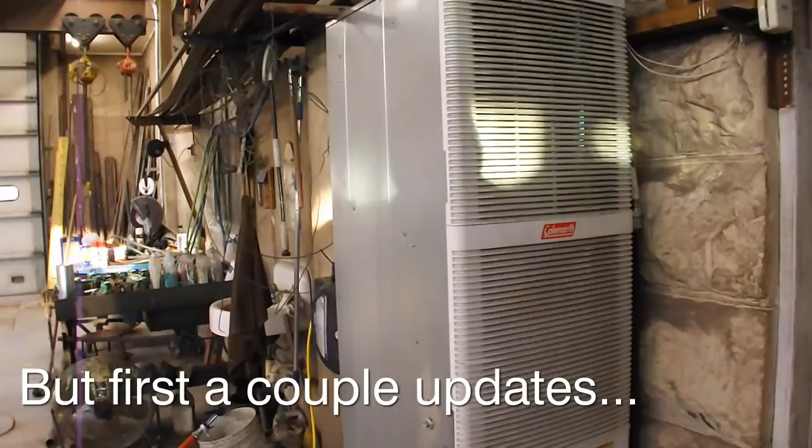It's been a few days since I've had heat in the shop, and it got cold in here, but it's up and running. Furnace man got it going finally. He could have had it done really quick, except he had to order some parts. But I tell you this largely because I want you to realize how much quieter the furnace is now.

I had realized when I started up this fall that the camera was really picking up the furnace. Anytime it would kick on, it was really hard to hear me. I'm standing really close to it right now, so that's probably making it a little bit harder to hear me, but it was really an annoying noise coming out of it.

And then one day it quit. So I called the furnace guy and he came out and he instantly told me that the combustion fan blade had literally disintegrated. He thought maybe that's why it was making a lot of noise at first, because one of the blades had come off and it was unbalanced, and then it finally just exploded.

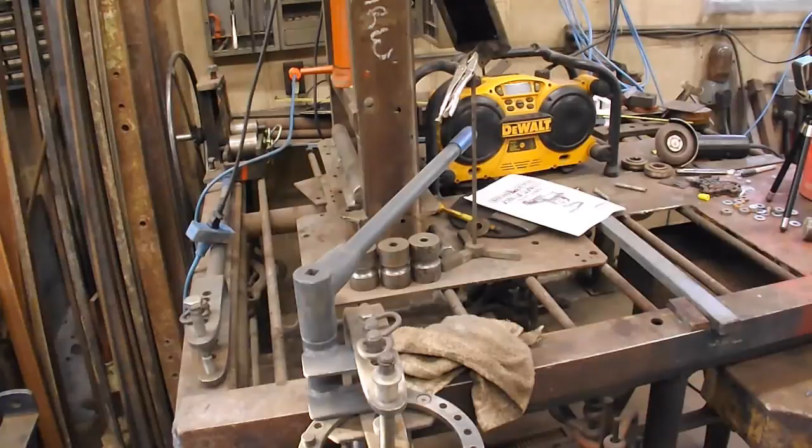But anyway, it's up and running. Should be a lot quieter in the videos. We'll see today if you can hear me when I talk, and this is my normal distance away from it. Oh boy, it sounds a lot quieter. It's kind of like a porta power, whatever you want to call it, for me. You know, I just got quick connects on there and off the hydraulics of the crane.

But enough about the furnace. I just received an order for a mud bench, and I have to have it done 5 days from now. And you say, oh, you got 5 days to do it. Well, that includes making it and getting the paint to dry, and that doesn't include all the other jobs I have to do along the way. I actually have quite a bit of a backlog going right now. Normally January is a really slow time for me, but it has been super busy.

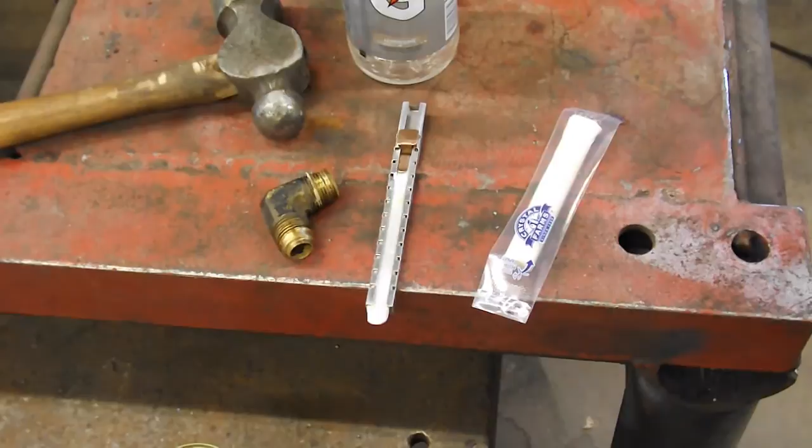I'm grateful for it. And since I'm jabbering on about things I had to do, might as well add one more thing. I had some fuel troubles in my welding truck this week. When I get down to about 10 degrees, I just couldn't go anywhere. I had no power. I could tell I wasn't getting fuel. So I brought it in the shop. Just assumed I had some water in the fuel or something, and it was icing up.

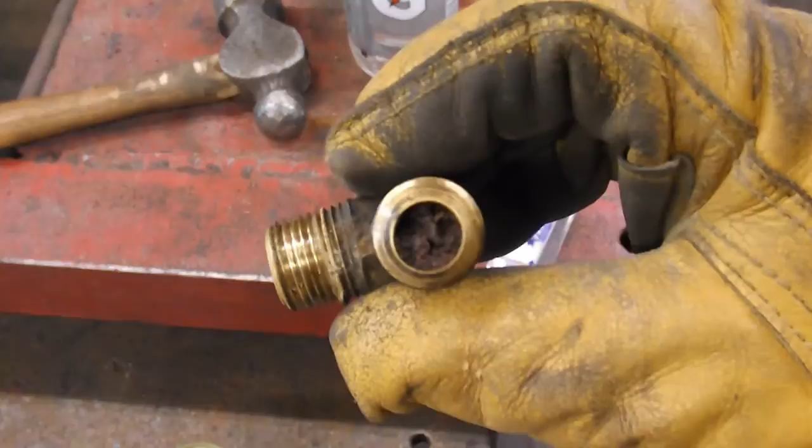So I started looking at things and playing with things, and I took out the suction line. Can you see that? It was a bit clogged. That is rust out of the tank. That is bad. I don't even know how I was getting any fuel through it. Tell you what, it runs a whole lot better now. It's amazing. Of course, it's a 1981 truck, so you know it's bound to have some issues by now, right?

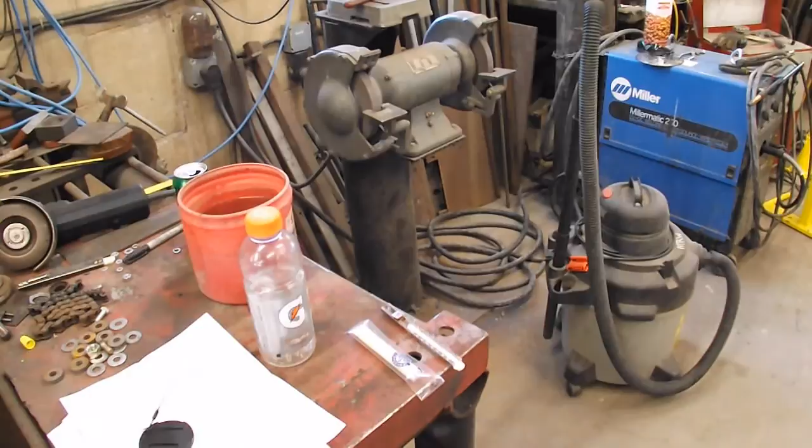Okay, I'm going to show you a dead mouse here. So if you don't want to see it, look away. I'm just going to show you really quick. But I caught a mouse in my dog's water bucket during the night, apparently.

The reason I showed you that real quick is not to gross you out, but it reminded me that I haven't told everybody, but that yellow shop cat that hung around, his name was Wash, he passed away. So it's been kind of sad. He was only 3 years old. I don't know what happened to him. He disappeared for about 3 days, and he came back home skinny. You could see his ribs. He laid down by the water dish and died. So I don't have a clue what happened, but it was very sad.

But anyway, I need to find another cat, because obviously I still have mice in here. Sorry for the image of a dead mouse there. Let's get back to work. Mud bench I'm building—I'll show you a couple pictures here of ones I've made in the past, that way you kind of have an idea where I'm going.

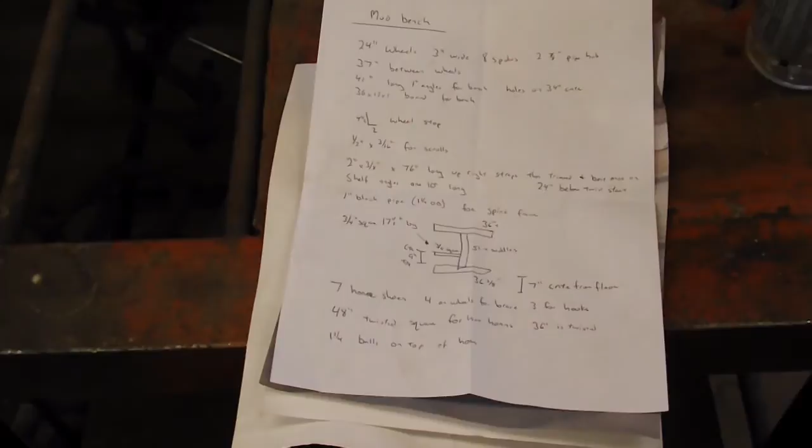And then I'm going to start getting materials laid out here and start figuring out what I'm doing. I haven't actually sat down and made a computer drawing of this thing yet, and I need to, because I keep getting orders for these things. But this is my squigglings of my dimensions and kind of what I need to do.

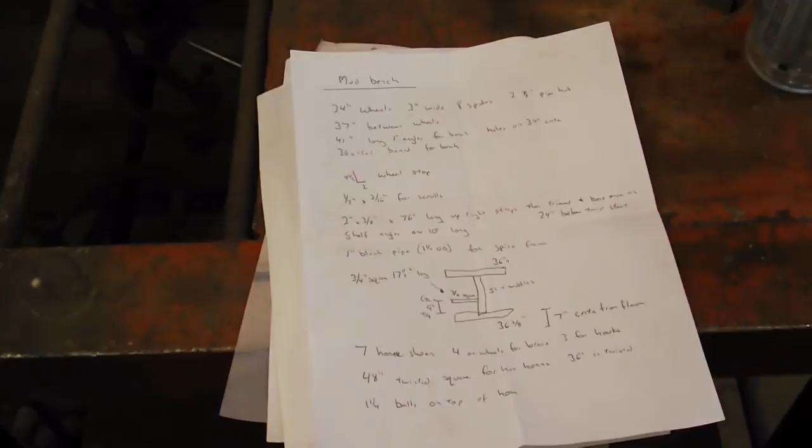While I'm rounding up my materials, I'm going to start the horseshoes in the electrolysis. These are some used horseshoes that a cousin of mine gives me from a ranch out in Colorado.

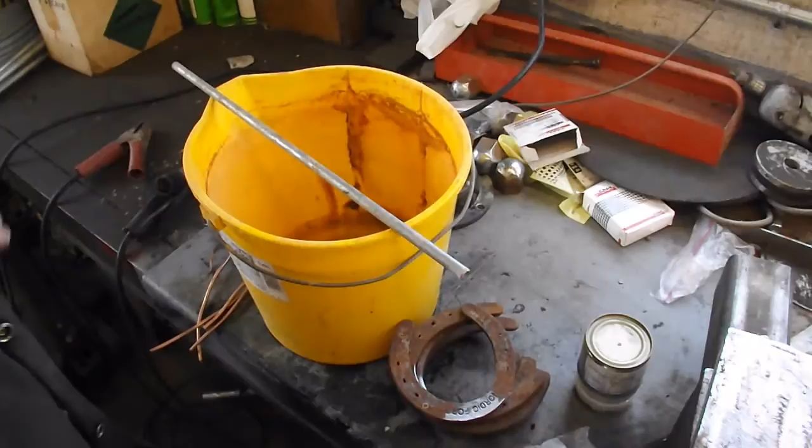Well, I got my little bucket up here on the bench. Normally I do this outside, and I highly recommend doing it outside, but seeing as how it's winter and that ain't gonna stay upright without water in it, and it's 20 degrees outside, I am going to do it in here.

I'm right next to my window over here so I can open it and get a little fresh air now and again. This shop is pretty drafty anyway, so I don't worry about it too much. So my official stance is don't ever do this inside.

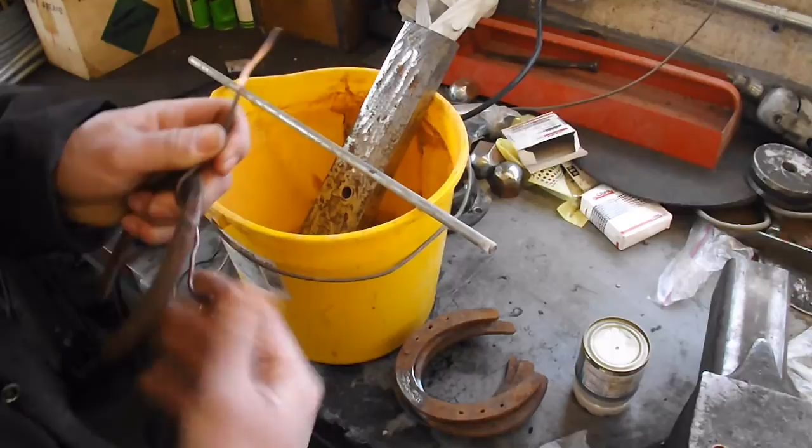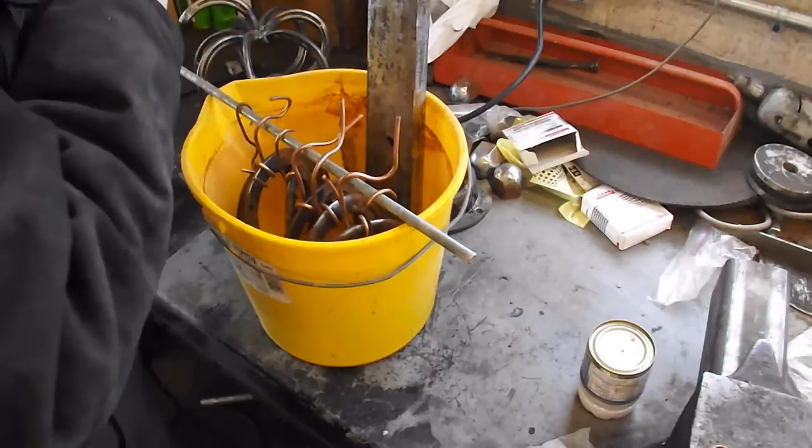Let's see here. We'll see if that'll accidentally stay in there. Yay! Let's see, positive over here, right? Because I want it to flow from the horseshoes to the scrap metal, so yes, that would be the correct direction, because it flows out of the negative and then returns into the positive.

Okay, so I got them hanging in there. That one's not bent quite right.

And we'll turn on the battery charger and see if we can see bubbles.

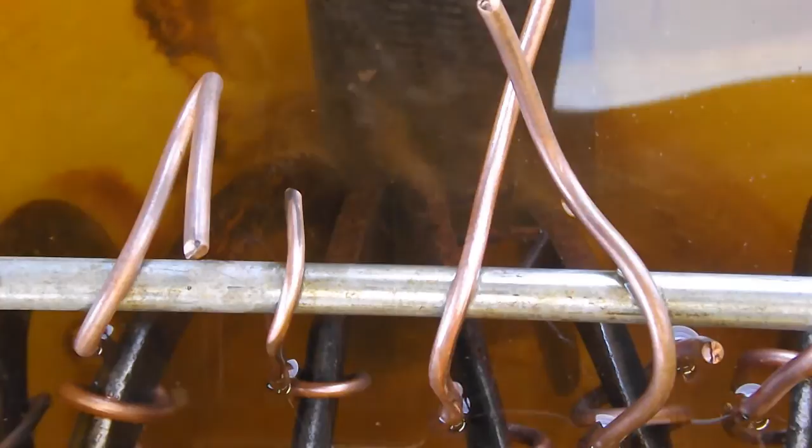So we'll check back on this in a couple hours. I imagine within an hour, actually, there'll probably be a layer of scum floating on top of this thing. And then eventually I'll turn all these half a turn so the other side of the horseshoe is facing the piece of scrap iron. But boy, it's bubbling already.

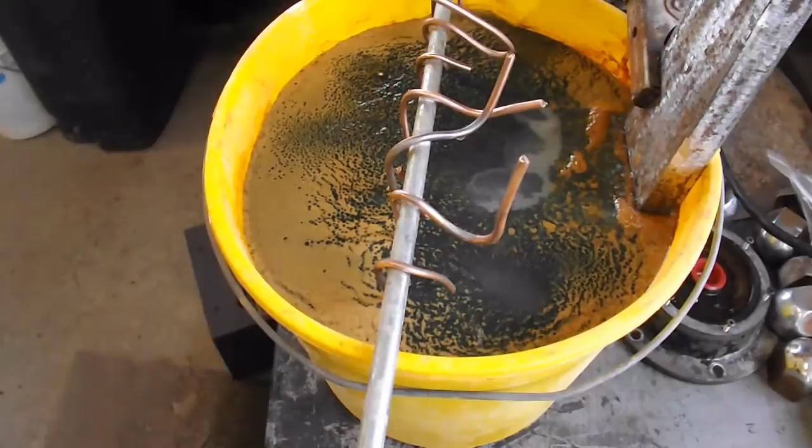Well, I thought I'd take a little break from building the frame and show you the progress on the horseshoes. Look at all that yummy crap that has floated up already.

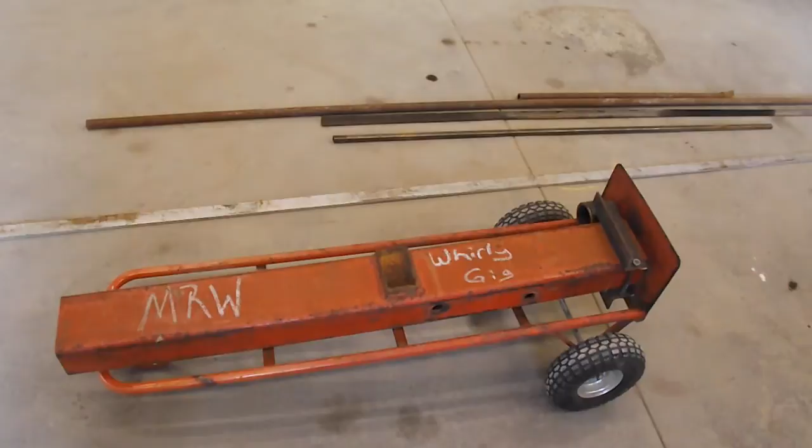I have most of the metal for the frame of the mud bench laying here, and I got my whirly gig laying here. I'll get it set up on the table and show you how it works.

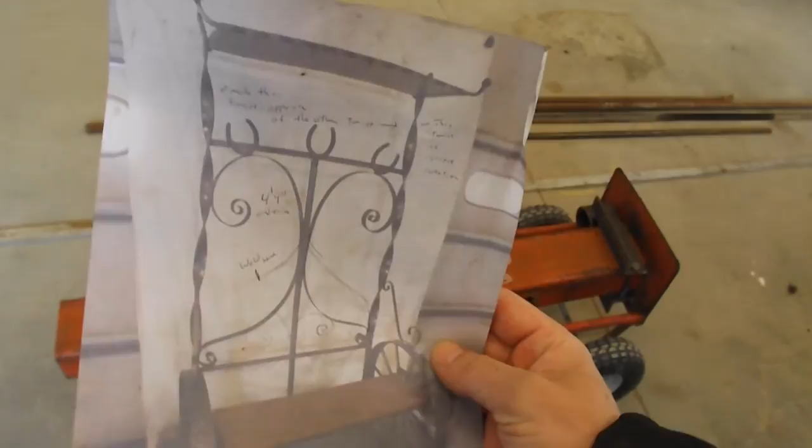I put this thing together to twist the metal on the uprights of the mud bench here. I twist that metal. This one, you can see it kind of weaves in and out a little bit because I did that just by clamping it onto a table and using a pipe wrench and making the twists, and it didn't come out very straight.

So the next one I did, I made myself a little jig so I can turn these. And I have to remember to twist them opposite - one goes clockwise and the other one goes counterclockwise when I make them, so they'll fit together correctly. Anyway, I'll get this set up and show you how this works.

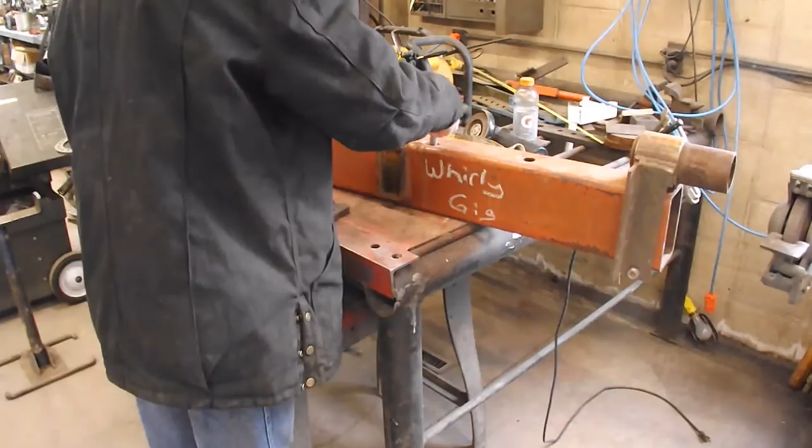In case you're wondering, the way this works is this piece slides on here. Put that at the end, flush at the end.

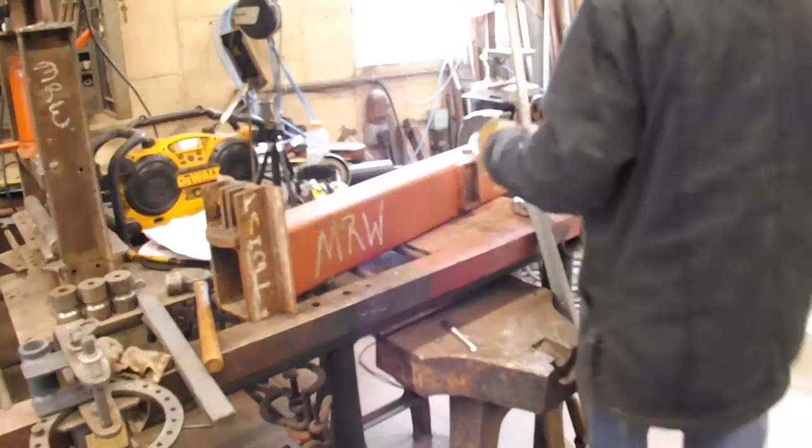Yep, okay. These are 2 feet from the end is where I start. Just drops in there. And then slide in here.

On this side, I have a piece of pipe that I welded a couple strap irons in there. Then I use my little pipe wrench and just start twisting.

Before I get started on that, I'll have to remove this coat. I'll tell you that right now.

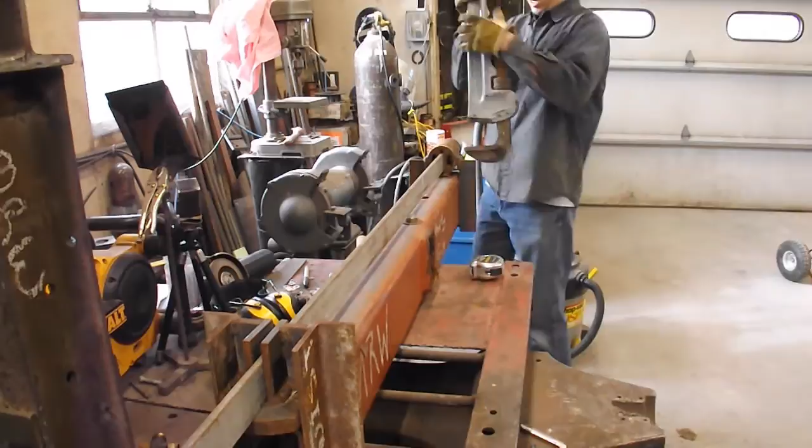I think I'm out of shape. Let's see, last time I went this way, so this time I'm going to go this way. I don't know if I can clear it over here. Alright. Whew.

That's pretty close. Yeah. There we are.

I was just looking at these twisted pieces I did, and I realized I need to go another turn. There's supposed to be 4 twists in it, and I did 3.

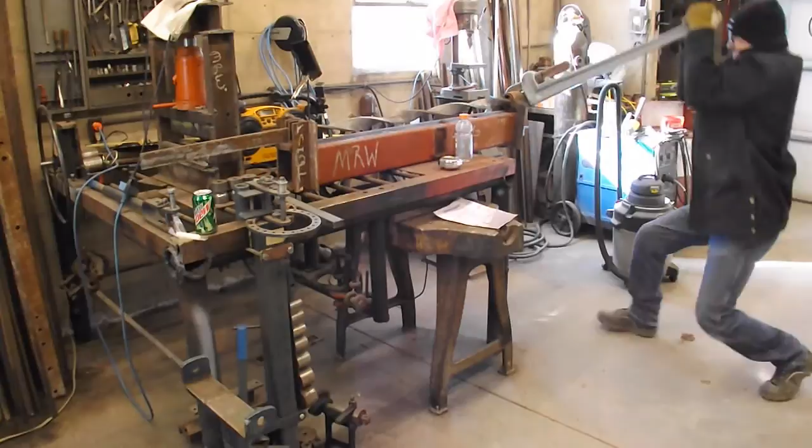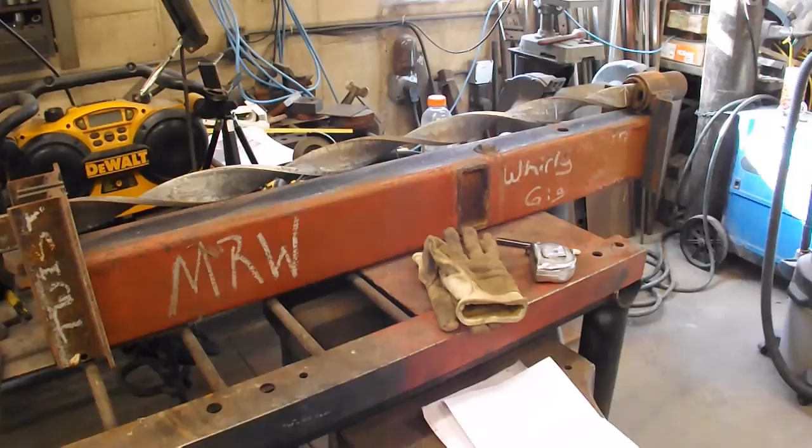I got 5. Oh man. Yep. So I only needed half a turn more instead of a full turn more. But I think I'm gonna go ahead and go with it.

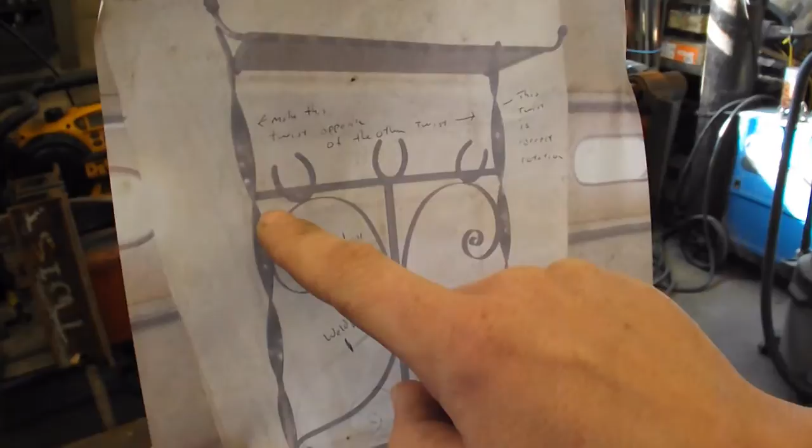This chalk mark right here is where the top bar comes across. This bar right here needs to fit between the two, in the flat between the twists. It'll put it 1 inch higher. So I think that's doable. That won't change much. I'll just slide everything up 1 more inch, which is no big deal.

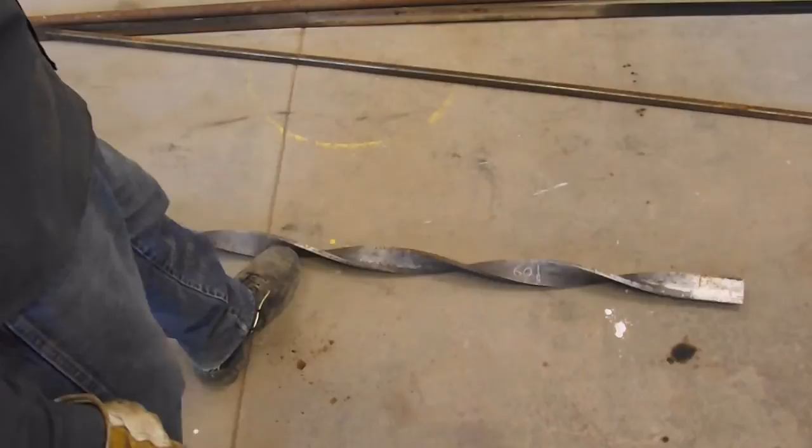Well, guess what? I untwisted it. I went backwards half a turn. And there was the 61 mark, and you can see it's not quite in the flat spot correctly. There's the 60 mark, and it's in the right flat spot. Those things are a foot apart, and all of them untwisted evenly. So I did not know you could untwist a twist and it would work.

So yeah, that's exactly what I'm looking for right there. So let's finish up this other one here real quick. That'll work. Whew.

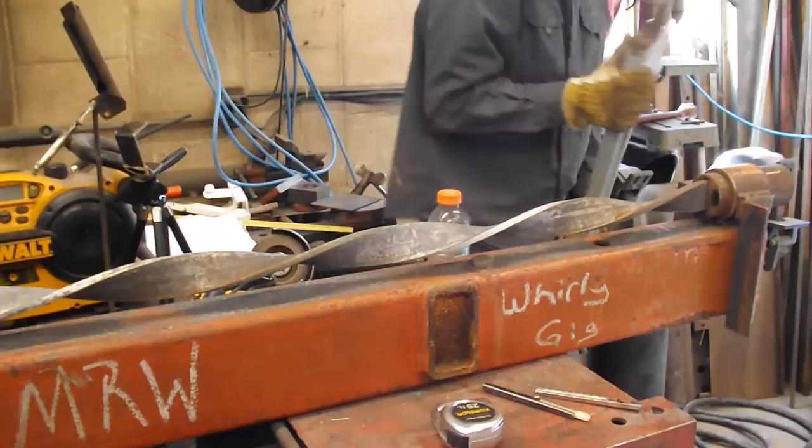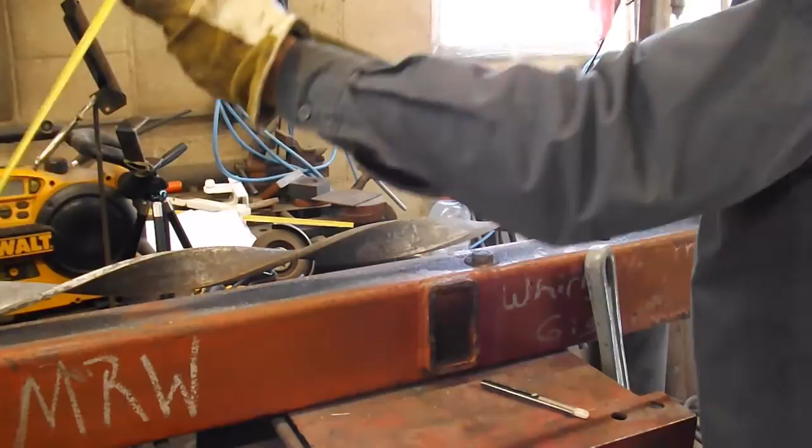Alright, we'll measure up 60 inches. And what do you know? It's in the flat spot. Okay, sweet, those are done. Back on track. Let's get to cutting out some other pieces.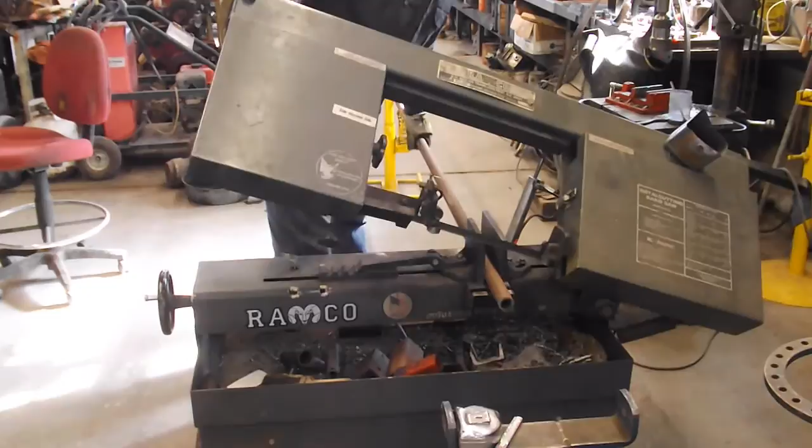16 too long. Gonna leave it.

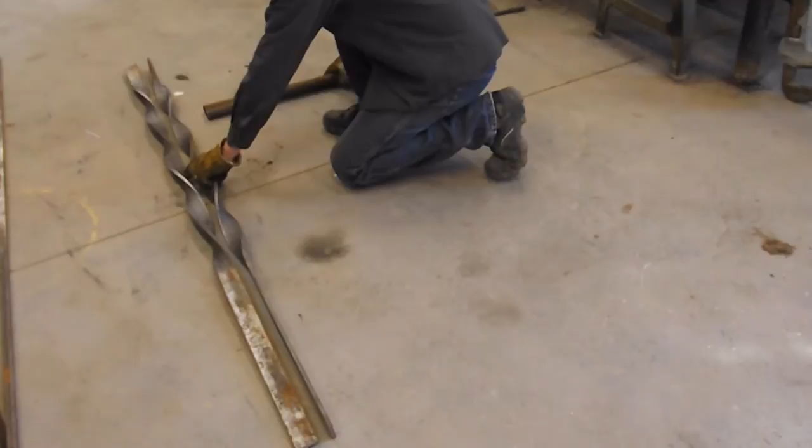Bandsaw is not shutting off today. Ooh, nope. Down there. Okay.

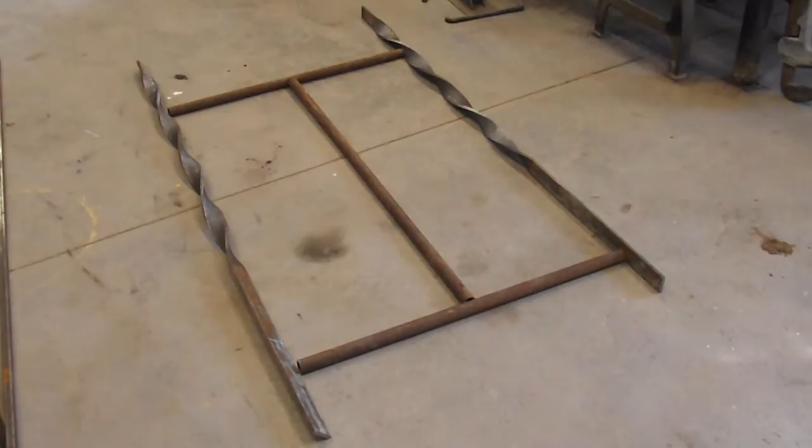I think now I'm going to take all these outside and clean them. It's nice and windy today, so that'll be great doing that outside. It'll blow all that crap away from me. It's also really warm, 60 degrees again today.

Let's see, I think that might have been the last video I did. I don't know, I'm kind of off on my videos because it takes time to edit. Some videos are really quick to edit, some are really long to edit. Some I have to wait till the finish or whatever. So I don't get my videos uploaded in chronological order by any means.

But in one of the videos I did recently, it was 60 degrees and there was a thunderstorm rolling across the plains. Then the temperature dropped to below 0 again, literally 2 days later. It's been super cold ever since, about 10 degrees for a high. And today it is 60 degrees again. I don't understand what's going on with this up and down weather. But hey, I guess I'll take a 60-degree day. That's better than 10 for a high, right?

Alright, anyway, enough babbling about the weather. Come on, get to sanding or something.

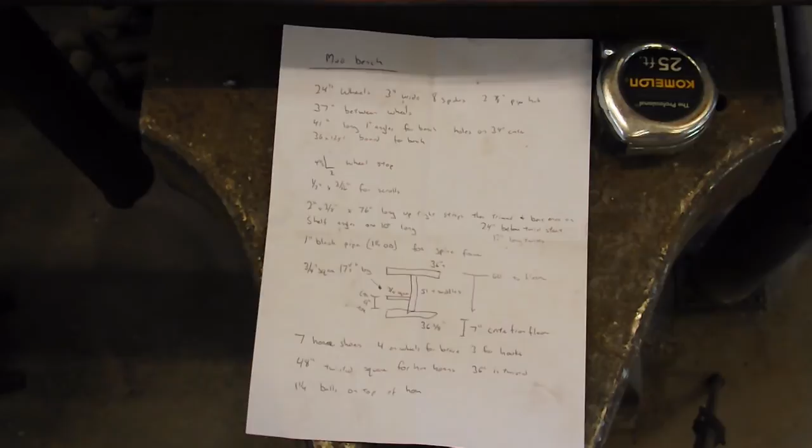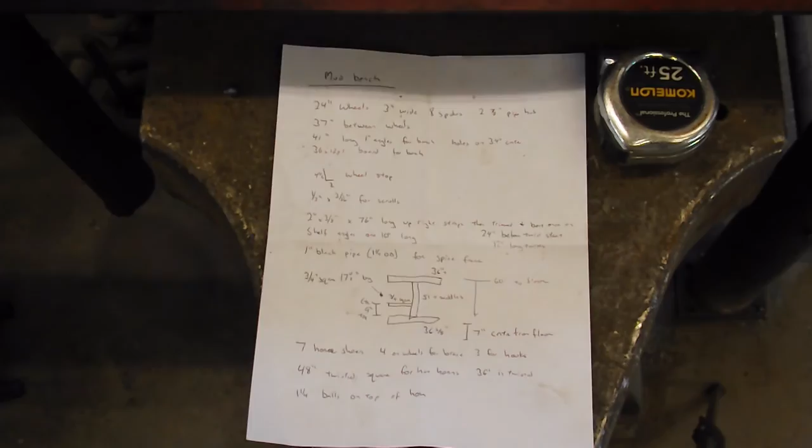Okay, so I'm going to go cut out some of these 1-inch angles, wherever it is on the list here. Yeah, so I guess some more bandsaw action for a little while. That's all I had left over. Whee, that's cutting it close.